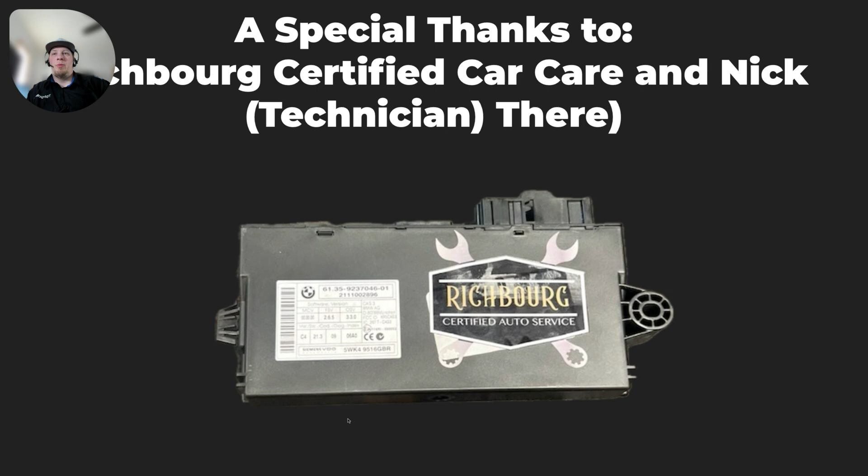Now we're going to move my bubble back here so you can see things well.

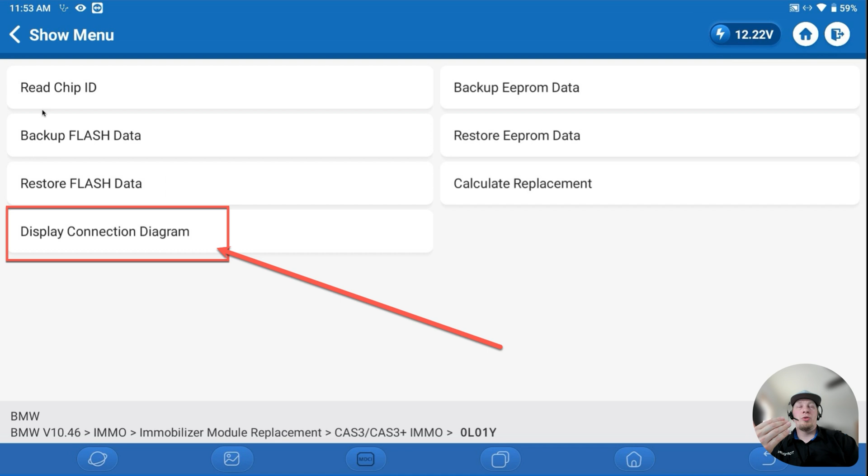So the first thing we're going to do after we've selected the appropriate unit is we have to look at the connection diagram so we know what we have to do in order to get this module to talk. Whoops, went too far, sorry. So you're going to get a diagram that's going to show you the board. So it's going to circle the MCU, which you see here, and then it's going to tell you what connections have to be made.

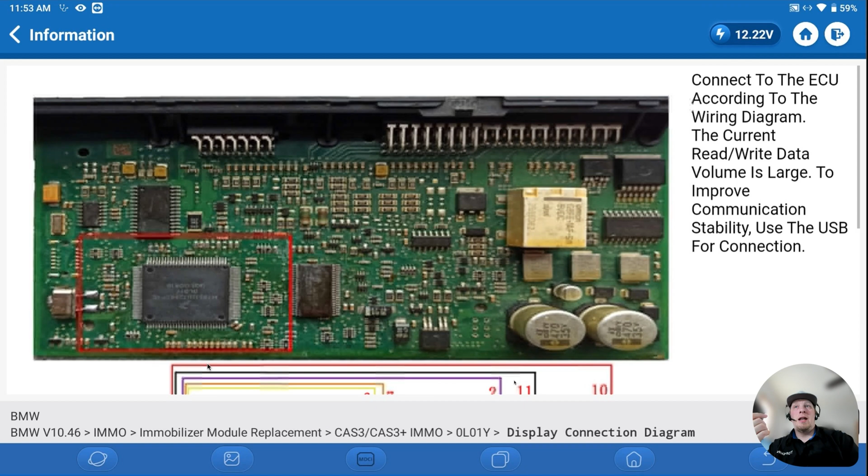Now, the resolution of this picture on my video is not necessarily as good as what you'll see on the tool, but you can see the tool shows you the exact connections you have to make and which cable and hardware you have to use. So you have to use the MCU V1 or MCU1 V2 as an adapter plate. Then we have to solder specific connections to the board in order for the connection to work. So again, like I said, we have to have a specific skill set here in order to be able to perform this cloning.

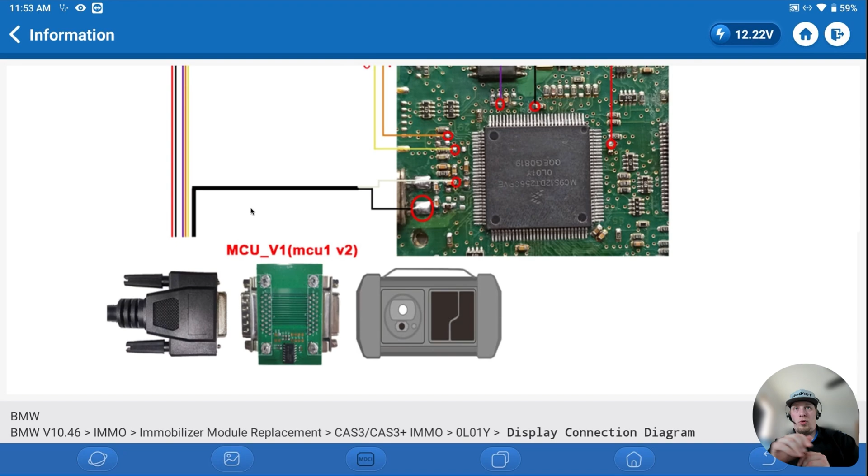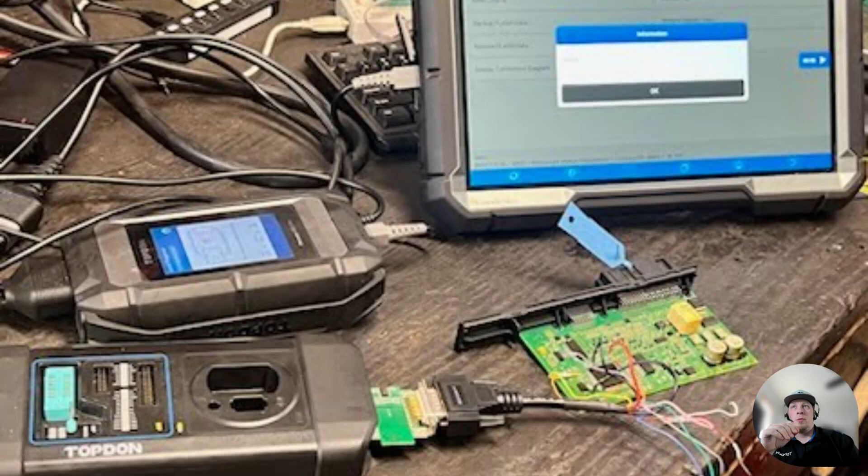Here's just a general picture once he's got everything soldered and he has the MCU adapter plate installed. You can see he's got the USB cable here connected from the dongle to the tool, and also the Y cable from the T-Ninja box to the dongle.

Once we've made the appropriate soldering connections, we're going to read the chip ID. This is the initial step in validating if we have an affirmative connection with the module. So we get a module chip ID, which means we do have an affirmative connection, which means we should be able to read the data.

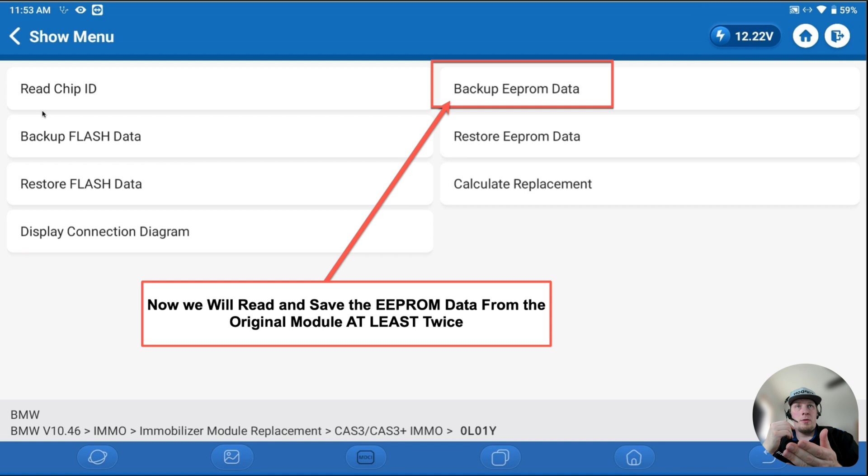So the first thing we're going to do is back up the EEPROM data. Now currently we are connected to the original CAS from the vehicle that has a problem. Again, connecting to the original CAS first so we can harvest the data from that module. So we're going to connect. All the soldering's been done. We're going to back up the EEPROM data, and we're going to do this at least twice.

You're going to get a message like this that shows that it's making the connection to the chip. Then it's going to tell you if it connects successfully, it's going to ask you to save the file. When we name the file, I typically name the file something like original CAS and maybe the last 6 or 7 of the VIN, something of that nature, something you can use to differentiate what file is what. Something that's very clear. You could use the date, you could use the VIN, whatever it is that you want to use, so long as you remember.

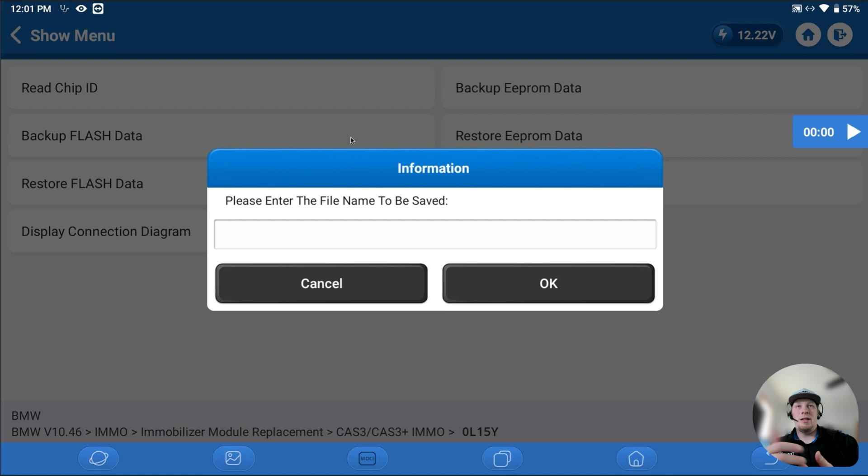The other key you want to remember is I would also place a suffix like V1 version 1 or V2 version 2 when you make multiple reads of the data. You want to make sure that as you make those multiple reads, you name them different versions. That way, when we go compare the data to make sure there's data consistency, we know that we have multiple unique versions, or hopefully not unique, right? We want them to be identical, but naming them version 1, 2, 3 is a good practice.

Now, we can go and back up the flash data. So now, we're going to read that flash data again, at least twice. If you have a CAS unit that may be having issues, you may have to read it more than a handful of times. In this particular situation, we had to read it 6 times before we got 2 files that were consistent with each other. And that can happen if you have a CAS unit that is starting to fail. So just be aware of this.

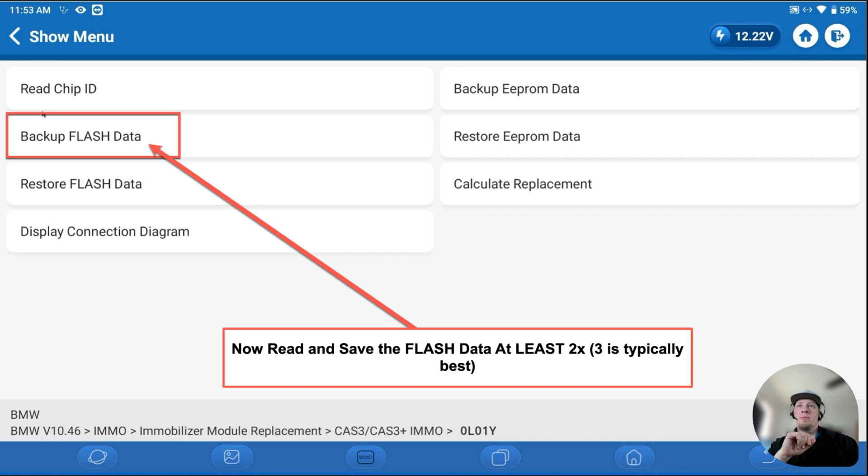Once we've read the flash data, it's going to ask you to save it again. And you see I'm going to name it flash data. And we're going to put a V1, V2 suffix on the end so we can differentiate between each of our files. Once we've saved the flash data and the EEPROM data at least twice, and there's our anti-theft data saved, right, the flash data, we're going to go to the exit button, the little door in the top right corner here, and we're going to go all the way back out to the main menu.

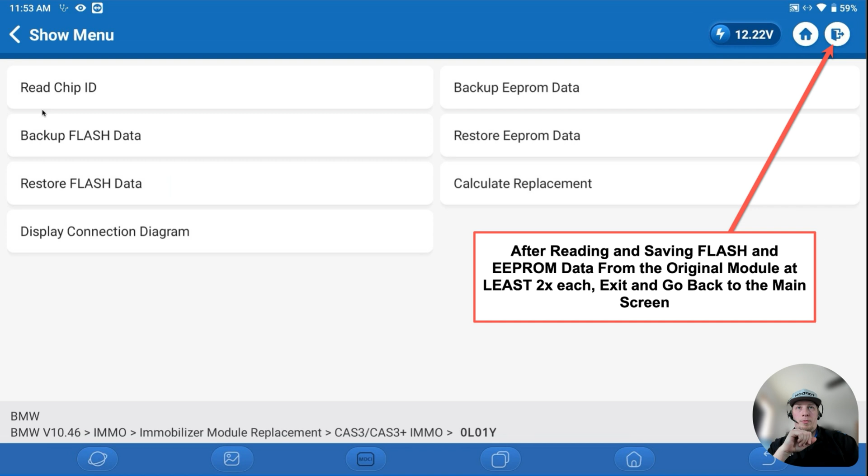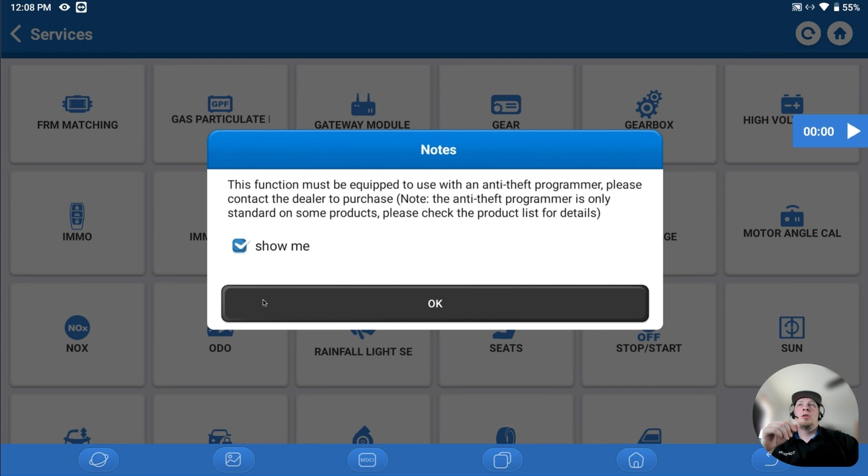So now we're back on the main menu, and again, doesn't matter which tool we're using here in the Pro Series, they're all going to have a services menu. We're going to click on the services menu, then we're going to go to IMMO Prog. Once we reach IMMO Prog, it'll give you a little warning indicator saying, hey, make sure you actually own the hardware.

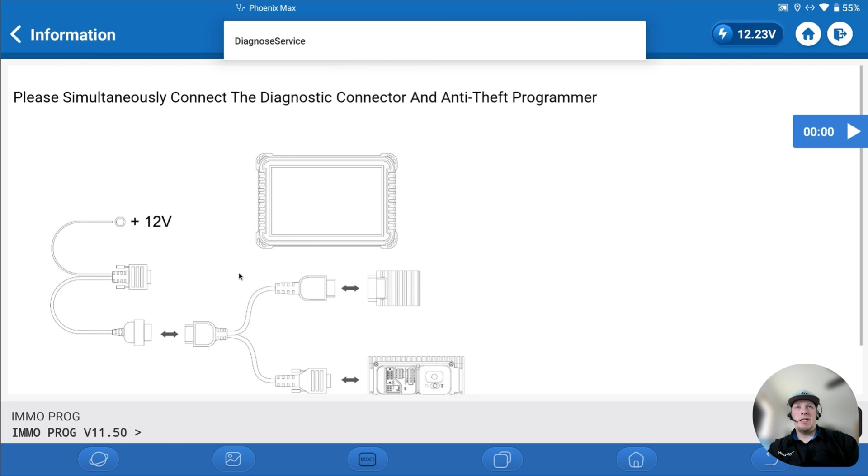Make sure your software for IMMO Prog is updated, of course. And then we're going to enter in. Again, we have to have the T-Ninja box and the dongle connected together with the Y cable, with the power supply plugged into the Y cable, and the USB cable plugged from the dongle to the tool. You may get a firmware update on your T-Ninja box when you go into this menu, so make sure you go ahead and perform that.

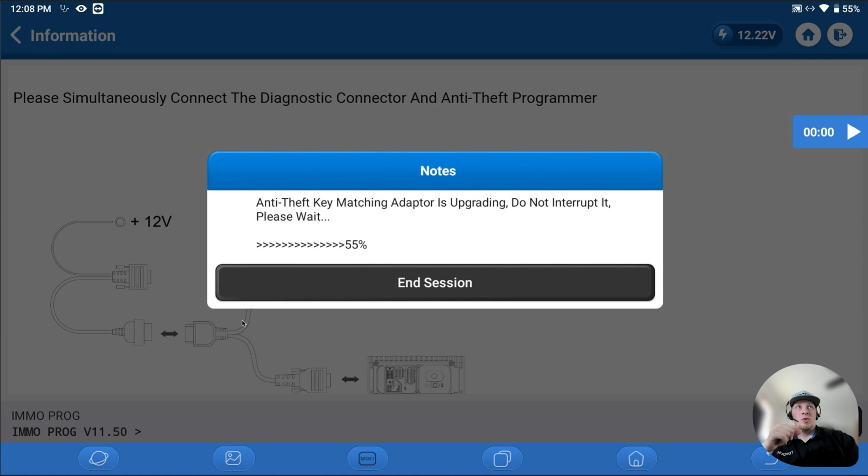Ours is upgraded, successful. Now, once we're into the menu for the IMMO Prog, we need to run the data comparison tool. The function of this is to verify that the files that we read from the original CAS module are consistent. If they are not consistent, this may mean that we had issues with our connection. The module could be failing internally. There are a number of possibilities, but we want to keep this in mind.

We need to make this data comparison to make sure that the data that we read is not corrupted. If we do not do this, we could write corrupt data to the donor CAS, which in turn would result in a crank no start. Maybe not even a crank. But no matter what, we're going to be in worse shape.

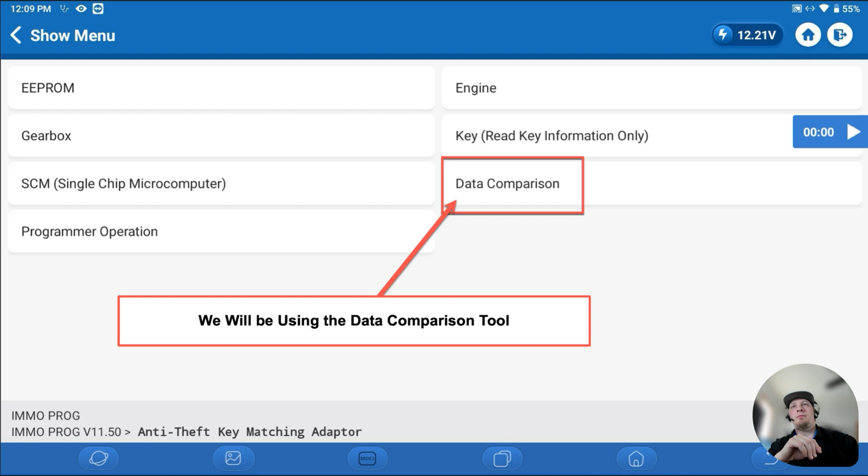So now, once we're into the data comparison tool, you'll see an F1 and an F2 button. Click on one of them first, load the original file, version 1, version 2, version 3, then click on F2 and load the second version you want to compare it to. So if we have EEPROM data version 1 and EEPROM data version 2 from the original CAS, we're going to load those side by side, and then we're going to use our comparison button.

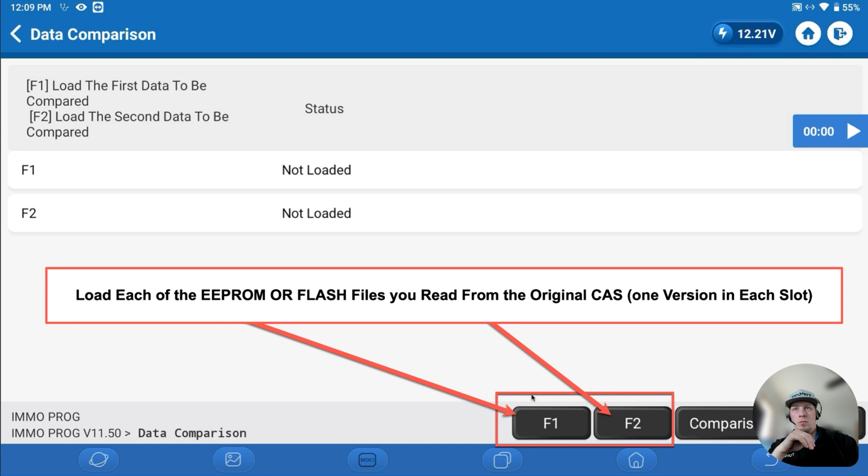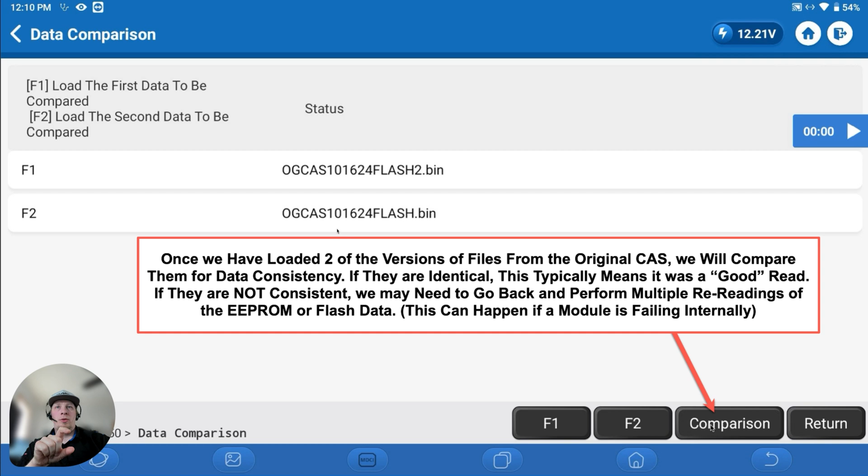You can see here, we have file data consistency. If it says that the contents are the same, that means that there's consistency in the data, which means the data you read twice or 3 times or however many times you compare the files is consistent. This is what we want to see. If, however, you get this message, then you have a problem with the data you read. If that occurs, you're going to want to go back and reread the related files.

So if you get 2 versions of EEPROM data you make a comparison on and they are not the same, then you need to go back and reread the EEPROM data several more times and compare each of those files until you get 2 that are identical. Then you need to make a notation of which 2 are identical, and those are the files that you would want to use for writing to the donor CAS. This is very important. The same goes for the flash data.

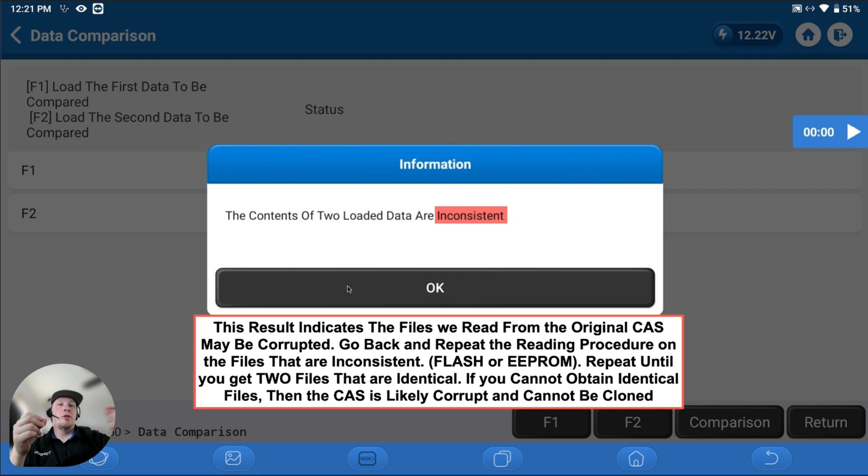If the flash data you compare, version 1, version 2, version 3, does not have file consistency, as we see here, there's an error, we need to go back and reread it until we get at least 2 versions that are identical. Why? Again, this is because we would be writing corrupted data to the donor CAS if we do not have at least 2 reads that are identical.

So now we have 2 reads of our EEPROM data and our flash data that are identical using the file data comparator menu in the IMMO Prog section of the services menu. Now, since we have 2 files that are consistent of EEPROM and 2 files that are consistent of flash, we can take ourselves back out to the menu. We can disconnect the soldering connections from the original CAS module, and we can now solder to the donor CAS module using the exact same wiring diagram we started with.

Now we're going to go back into the scan menu, just like we did originally for pulling the data out of the original CAS. We're going to go back to BMW just like we did before. We're going to hit OK.

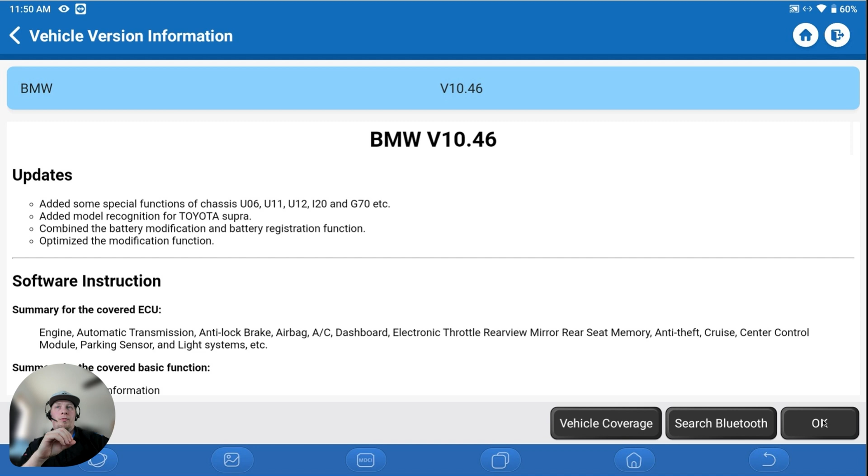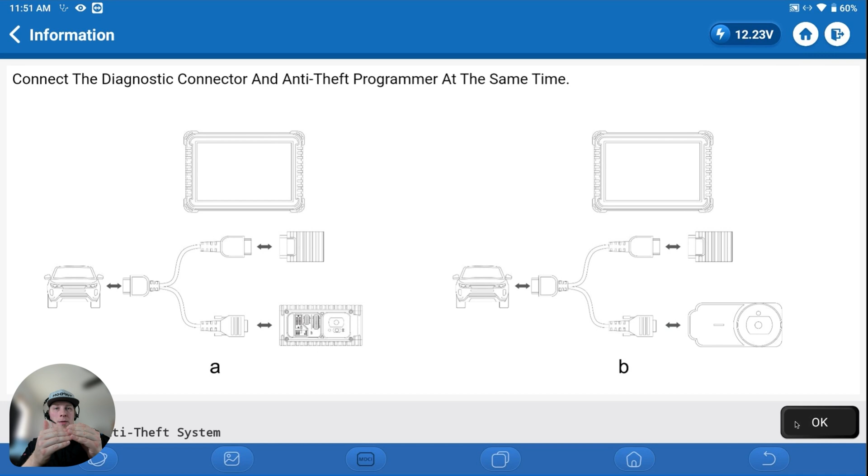We're going to go into the anti-theft menu just like we did before. We're going to make sure our T-Ninja box is connected using the Y cable, the USB cable from the dongle to the tool, and the power supply cable plugged into the Y cable. Now we're going to go back into the Immobilizer module replacement menu. We're going to select the CAS generation, the same generation we selected before.

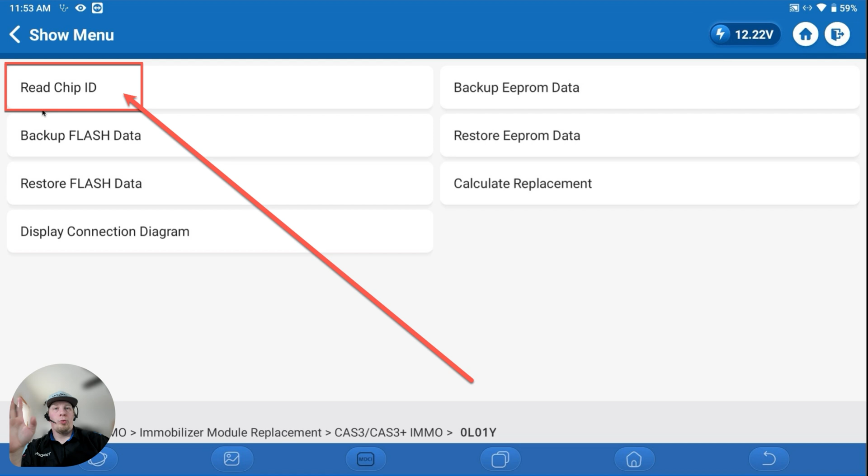We're going to select the exact same MCU chip designation as we did before, 0L15Y in this case. We're going to read the chip ID to confirm we have a positive and affirmative connection. We do. That's great. We've confirmed we have a good connection. We've proven that we can read the chip ID. We know our soldered connections are good. Now we can go ahead and restore the data to the donor CAS module.

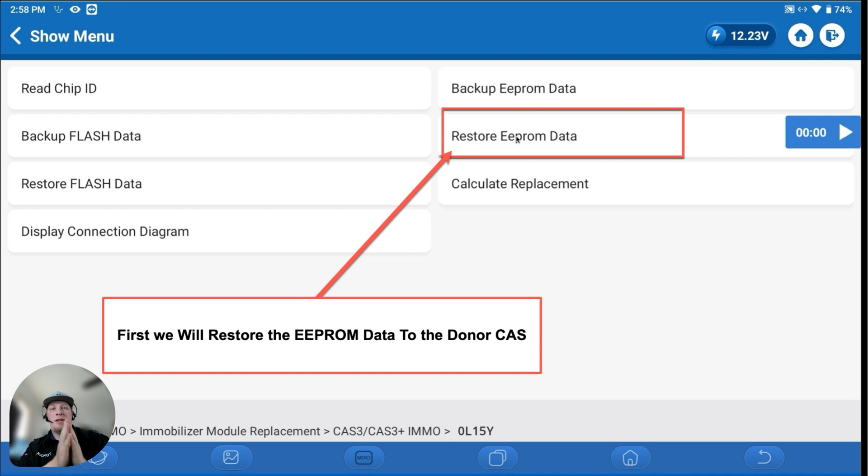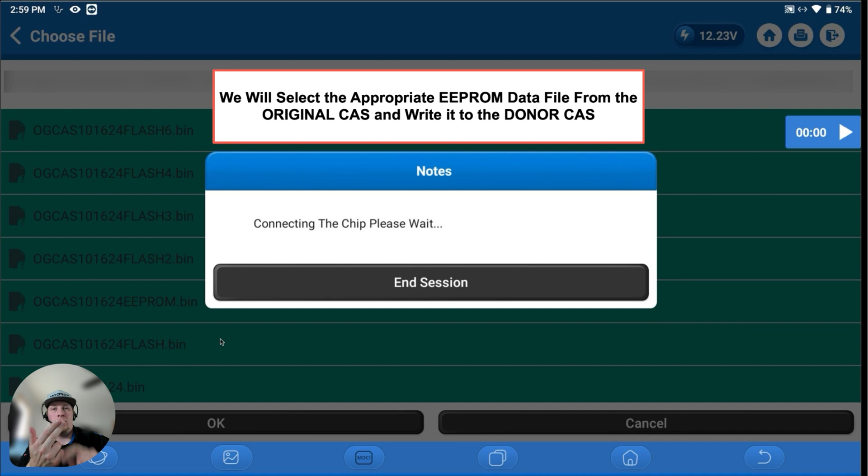Again, now we're connected to the donor CAS module, not the original. We're going to restore the EEPROM data first. So we're going to pick the file. Remember, we have to make sure we pick the file that we verified was consistent. So if we read the EEPROM data twice and they were identical, doesn't matter which one of the 2 you pick. But we've got to make sure we picked one of the versions that has an identical mate. Then we're going to write that to the CAS.

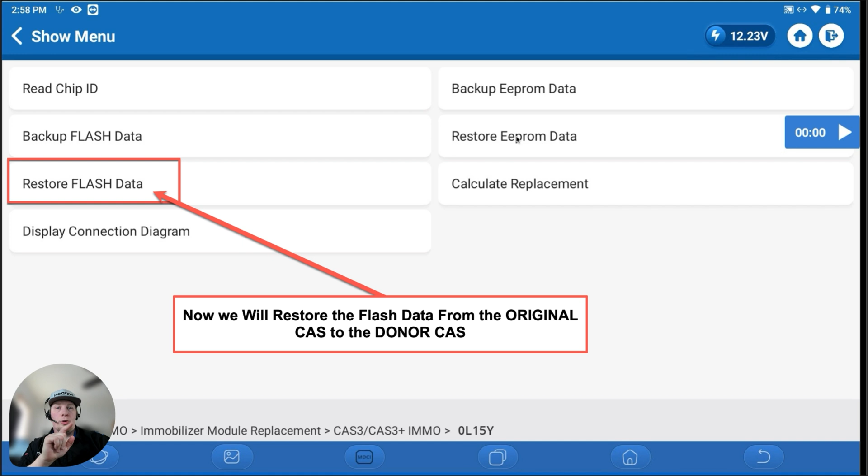We're going to get a message like this if everything was performed correctly. Restored EEPROM data successfully. Then we're going to go back to this menu. And now we can restore the flash data to the donor CAS. Remember, again, we want to choose one of the flash files that has an identical twin, right? Because those 2 are the good reads of data.

Then, when it goes to do the connection, you're going to notice that writing the flash data takes significantly longer than the EEPROM data. Don't disrupt this process. Make sure that the tool is sitting on a bench that nobody can mess with or interrupt, and let it do its thing until it's complete. Once we're all done writing the flash data, you'll see that we've restored the flash data successfully.

Now we can go back, exit out of all of the menus. We can go all the way back to the main menu. And the next thing we're going to do is go install that donor CAS into the vehicle, because we've written the EEPROM and the flash data to the CAS, so it now has all the same information inside it that the original CAS had. We can make all our desoldered connections, put the module back together, install it in the vehicle. Then we're going to reconnect the vehicle battery. Of course, that should be disconnected when we're removing modules.

After we've reconnected, we're going to clear all the fault codes, verify the car starts and runs. Then we're going to shut the car back off. We're going to start the car back up and rescan it once more and verify there are no Immobilizer related fault codes or anti-theft or anything of that nature. And of course, that the vehicle starts and runs.

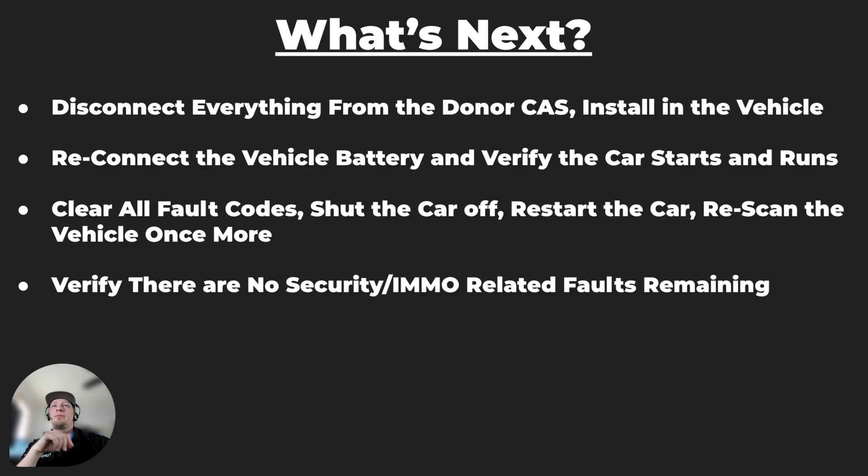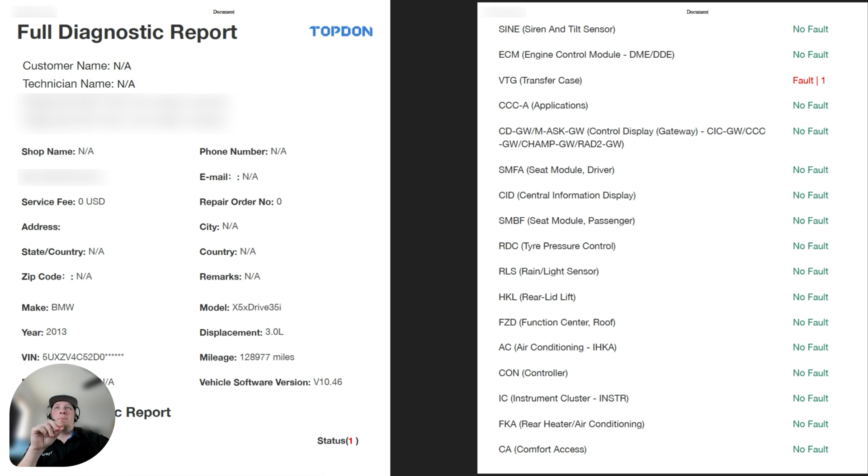So here's our post scan on the vehicle. You can see here that after we started it back up and ran it, we don't have any fault codes in anything related to anti-theft whatsoever. Everything in the vehicle is very, very happy, right? I'll move my little bubble here so you can see the rest of the scan.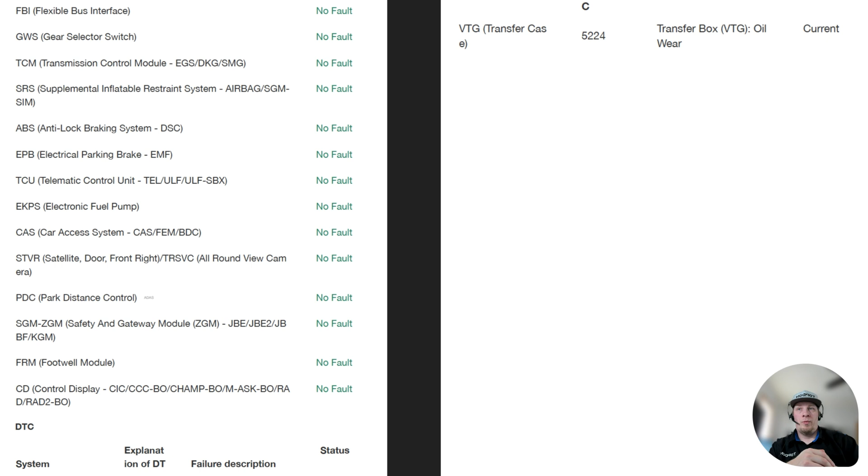So you can see we don't have any faults in any related modules. The CAS has no faults. Footwell module, no faults. ECM had no faults. TCM had no faults. So all of the modules that are involved in the Immobilizer function chain are fault-free. The vehicle starts and runs perfectly. This is confirmation that our cloning was successful. So that's exactly what we're looking for.

So I just wanted to say thank you for taking the time to watch our video showing you how to perform the cloning of this CAS3 module on this E70 BMW LCI platform. Again, remember, our video is specifically pertaining only to this exact CAS. The steps required on other CAS modules may be different.